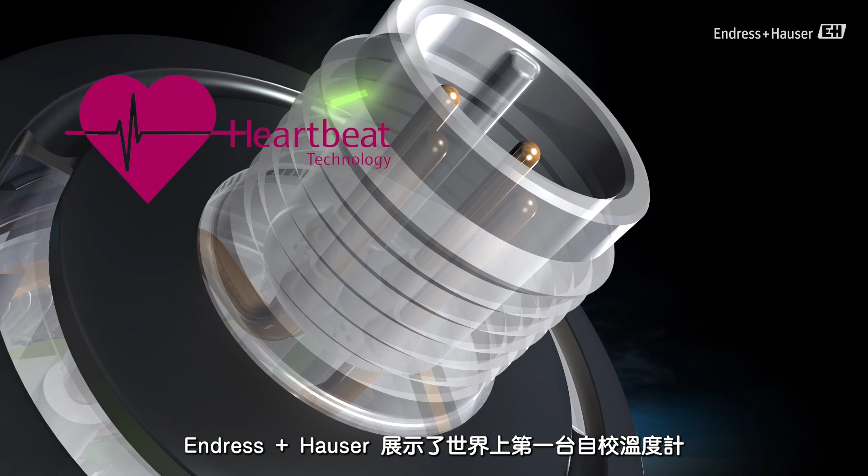Endress+Hauser presents the world's first self-calibrating thermometer, the iTHERM TrustSens with heartbeat technology.

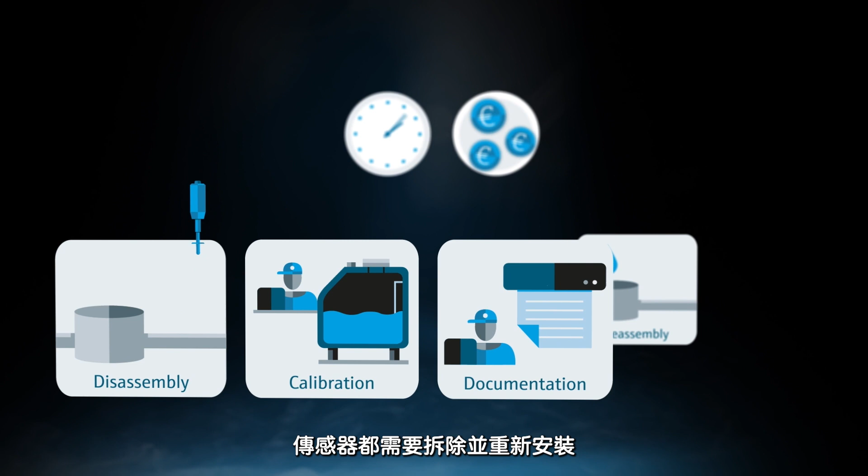In the regulated pharmaceutical and food industries, calibration of measuring devices is both standard practice and required by regulations. A modern biotechnology production plant for manufacturing medicinal products typically contains between 500 and 1,000 temperature measuring points, which all need to be regularly calibrated. This is a time-consuming and expensive process, involving shutting down the production plant, as all temperature sensors need to be removed and reinstalled as part of calibration.

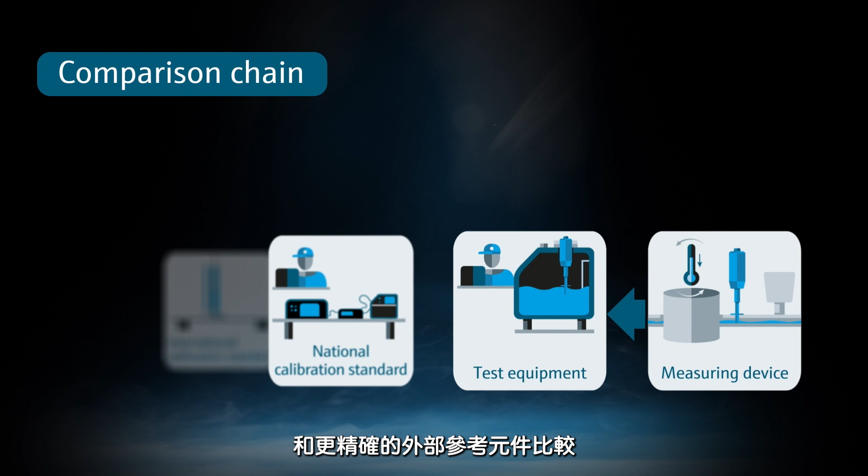One important principle of calibration is complete traceability. Within the comparison chain, each device to be calibrated is compared to a more precise external reference. This ultimately ensures consistent reference to recognized international calibration standards.

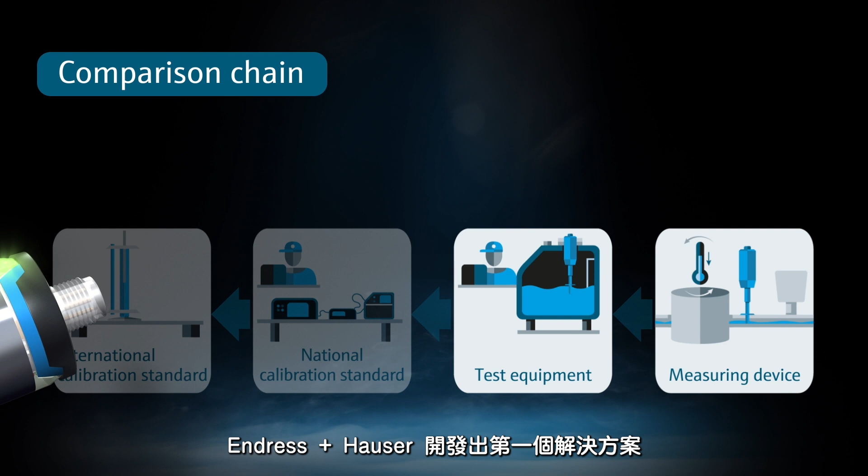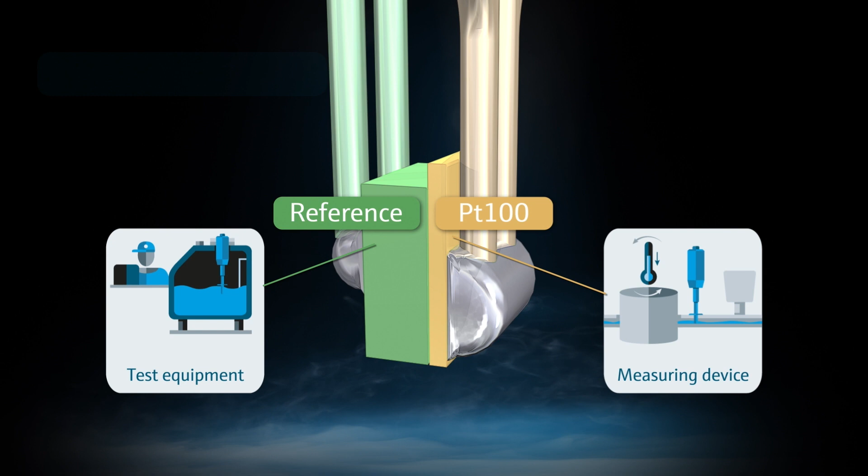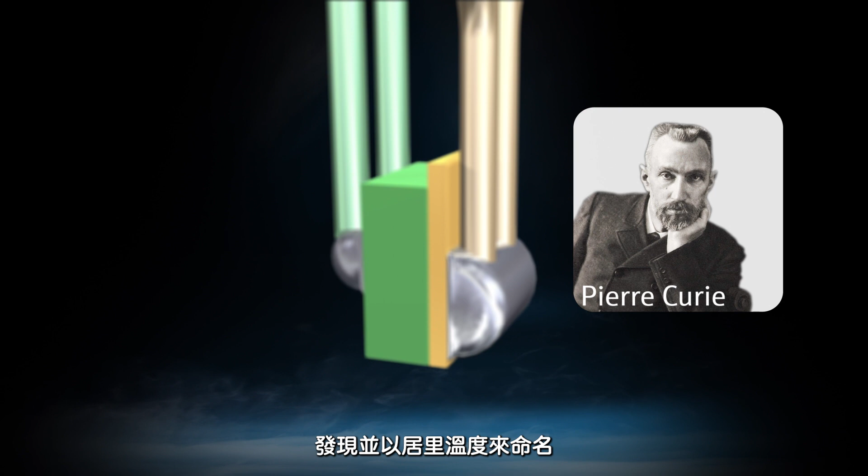Endress+Hauser has now developed the first-ever solution to integrate a high-precision reference with long-term stability into the thermometer itself. This is accomplished using a physical fixed point, the Curie point. The French physicist Pierre Curie discovered and gave his name to the Curie temperature, which is the point at which the ferromagnetic properties of a material abruptly change.

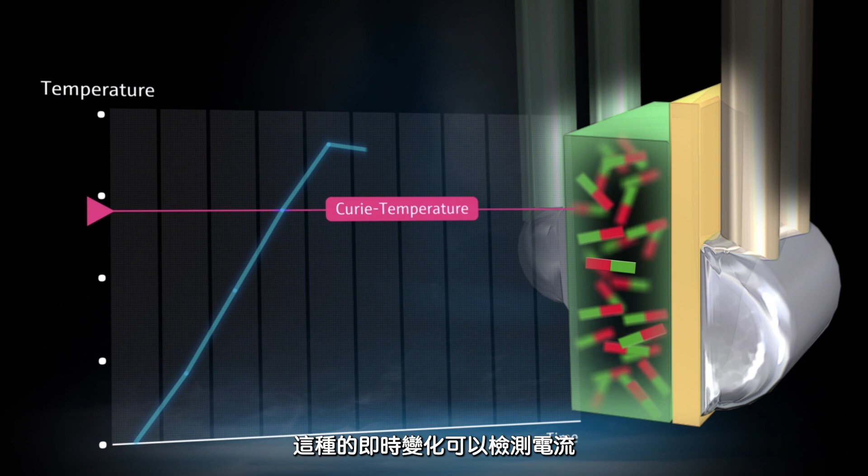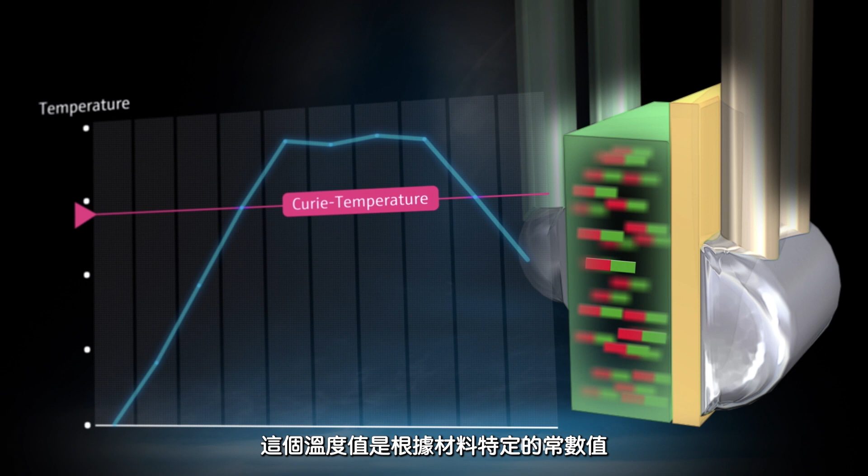This instant change in properties can be detected electrically, which enables determination of the point at which the Curie temperature is reached. This temperature value is a material-specific constant that will not vary from its originally determined value.

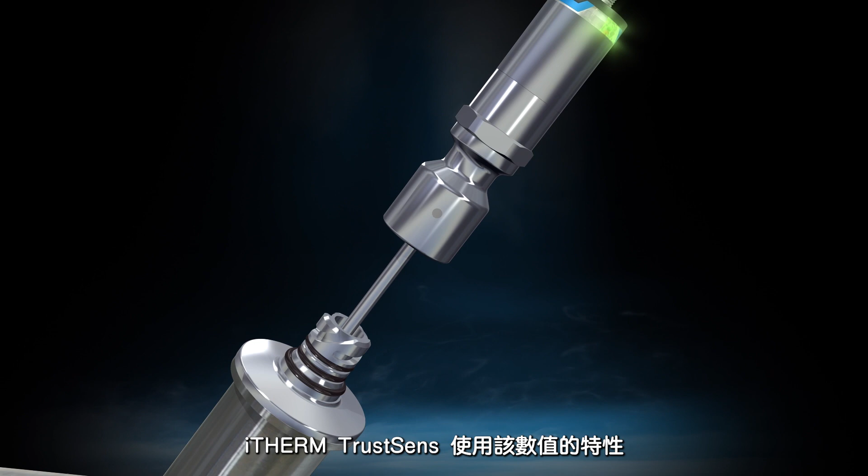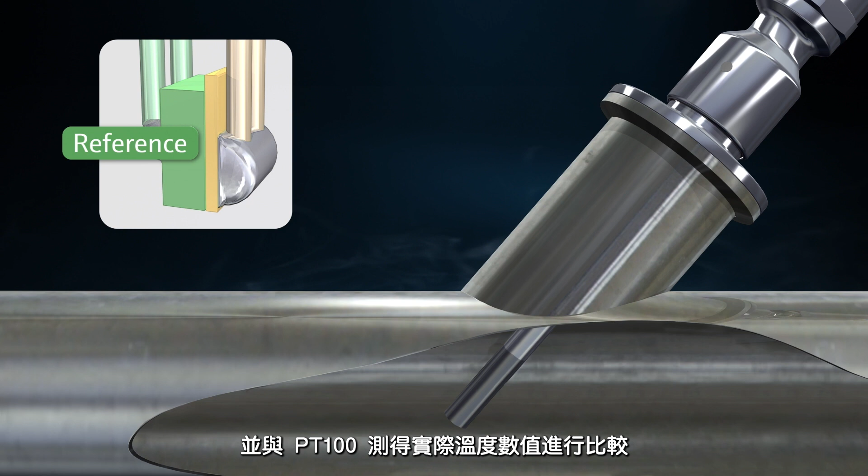The iTHERM TrustSens uses this value in the form of a reference sensor consisting of such a material. This provides a physical fixed point that can be used as a reference for comparison with the actual PT100 temperature sensor. In the example shown, the Curie temperature, which is determined with extreme accuracy for each iTHERM TrustSens prior to delivery, is exactly

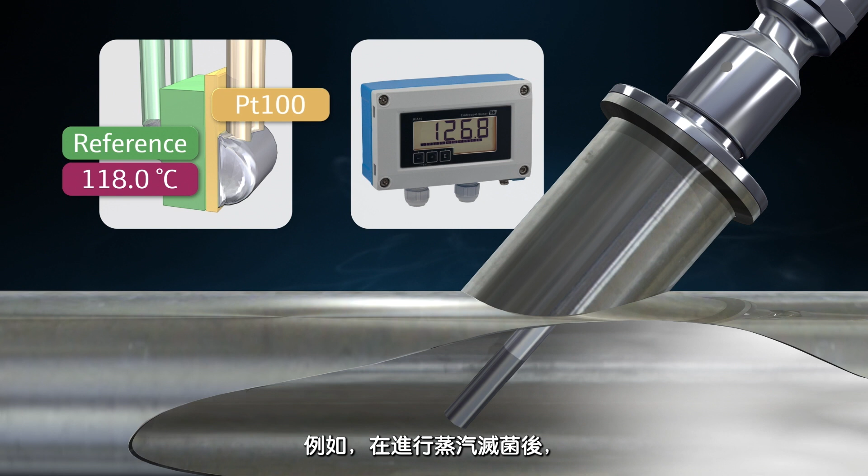118.0 degrees Celsius. Each time a cooling process is initiated, starting at higher temperatures, for example following steam sterilization of the plant, the PT100 sensor is calibrated automatically.

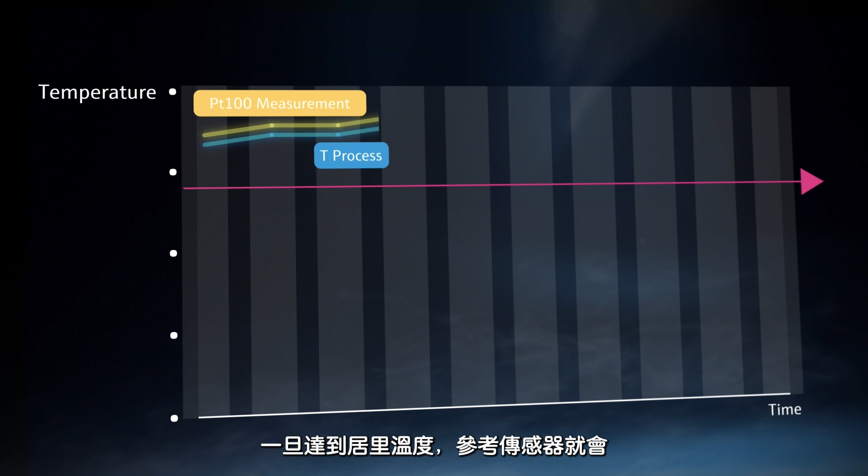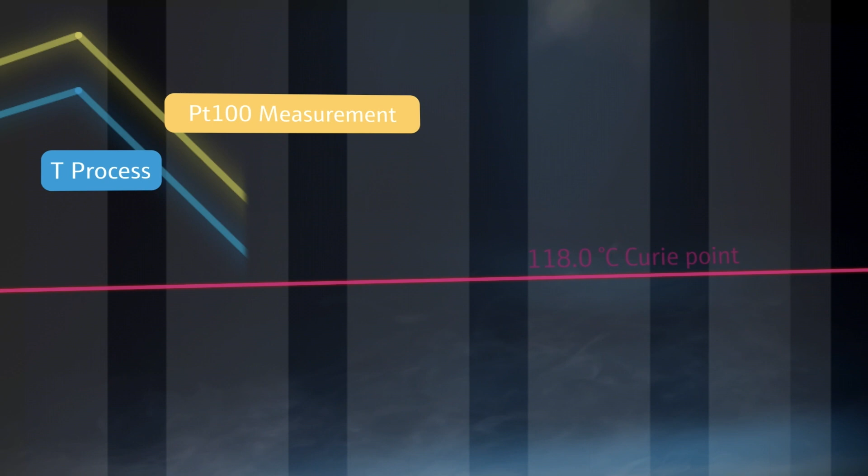Once the Curie temperature is reached, the reference sensor transmits an electrical signal. At the same time, a measurement is carried out in parallel via the PT100 sensor. Comparison between these two values is effectively a calibration that identifies any measured errors with the PT100.

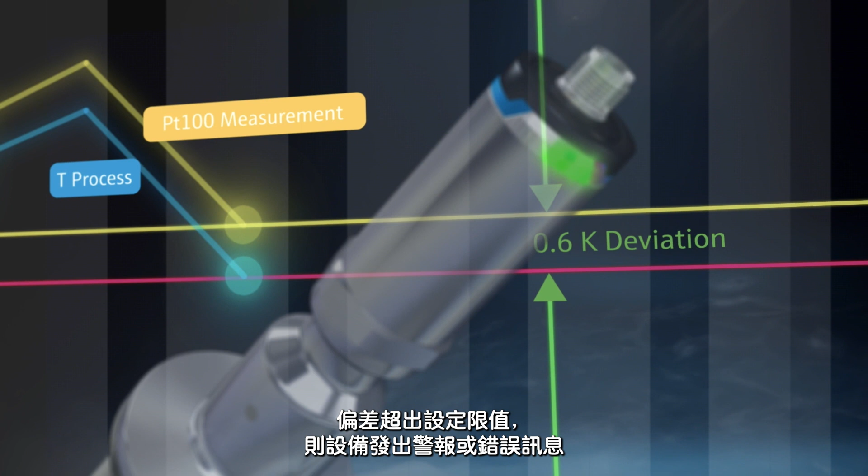If the measured deviation is outside of the set limits, the device issues an alarm or error message that is also displayed on-site via LED.

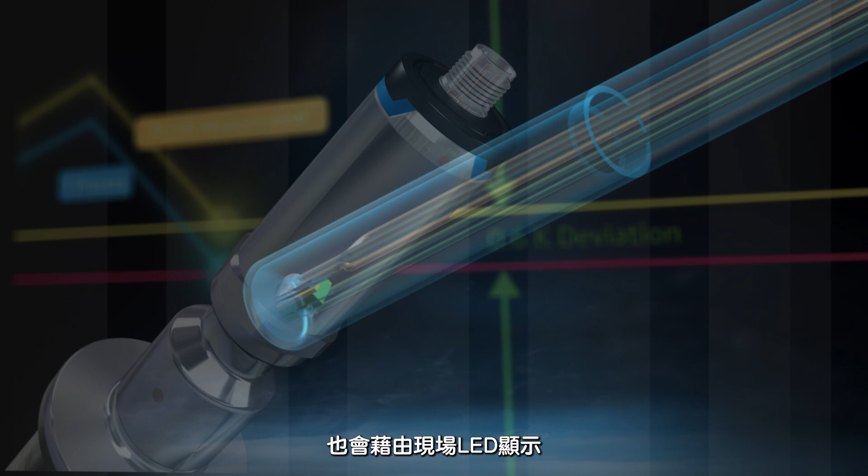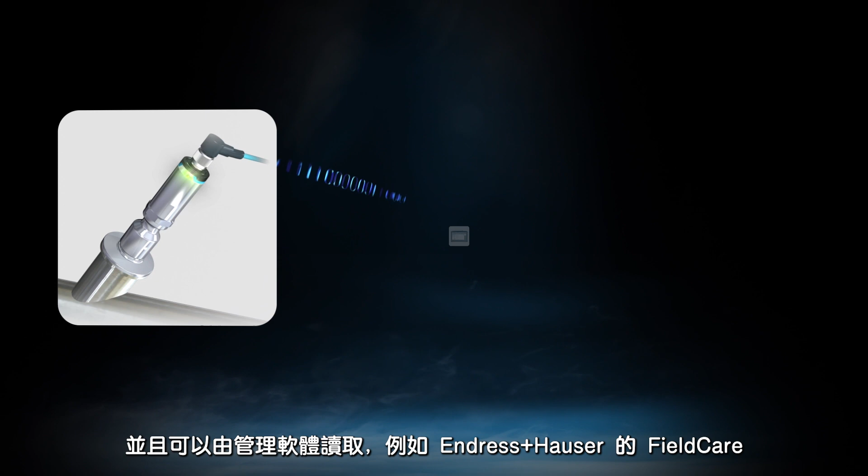The calibration data acquired is stored electronically in the device and can be read using asset management software, such as FieldCare from Endress+Hauser. This also enables an auditable certificate of calibration to be created automatically.

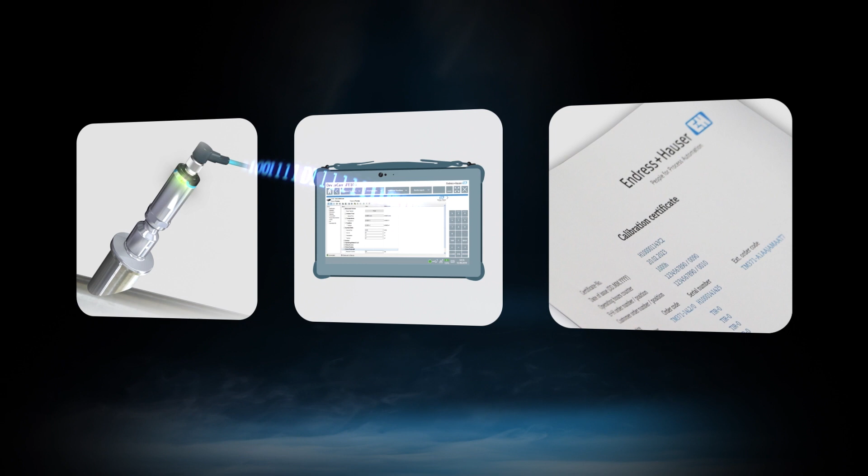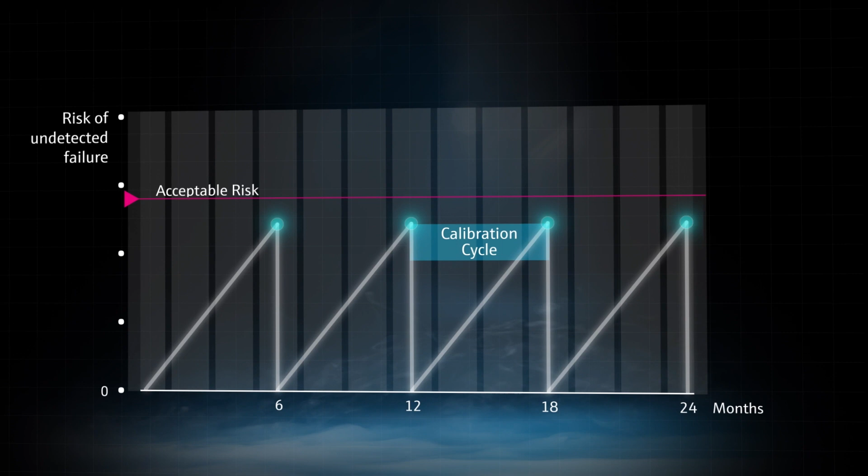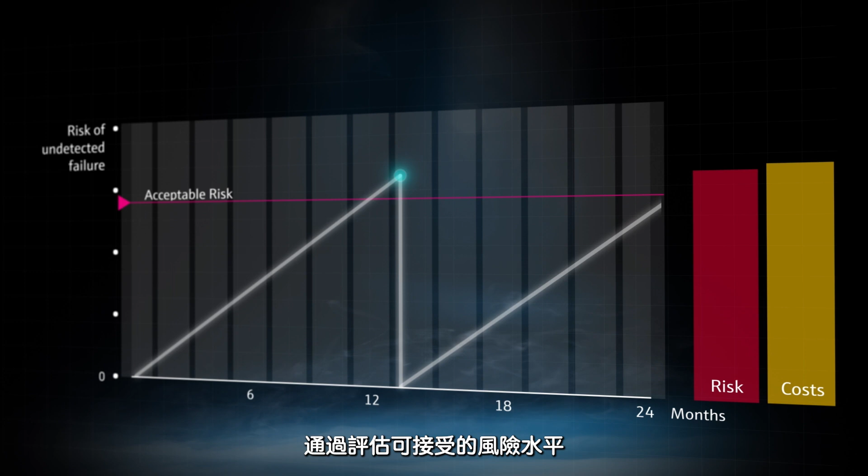All known temperature sensors, including Pt100 sensors, are subject to aging effects that can lead to drift. Longer calibration intervals increase the risk of undetected drift. Until now, these intervals have been determined by assessing the acceptable level of risk.

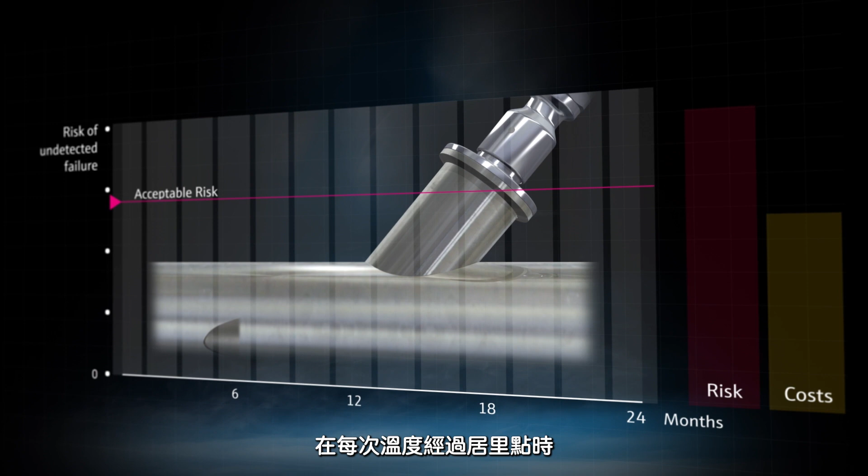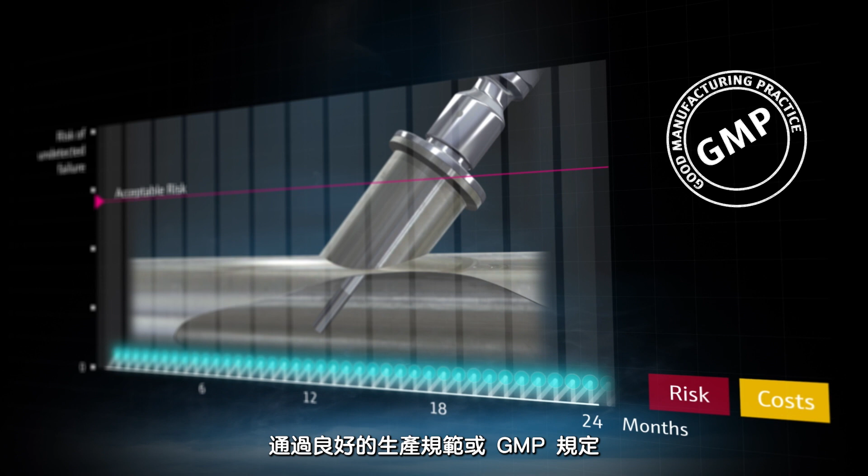Calibration is now carried out automatically in the iTHERM TrustSens each time the temperature passes through the Curie point, for example after each steam sterilization process. These cleaning processes are typically carried out with every batch. This drastically reduces the level of risk, prevents plant shutdowns, and avoids calibration costs. This kind of continuous process verification has even become required by Good Manufacturing Practice, or GMP regulations.

iTHERM TrustSens: risk reduction was never that easy.

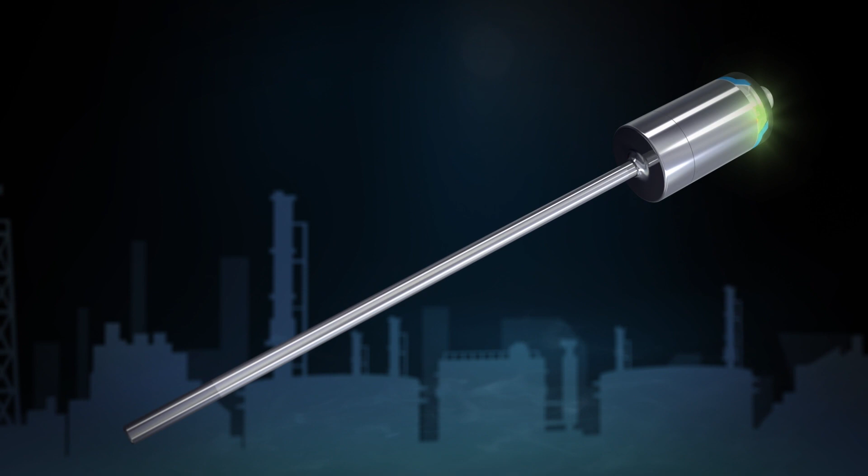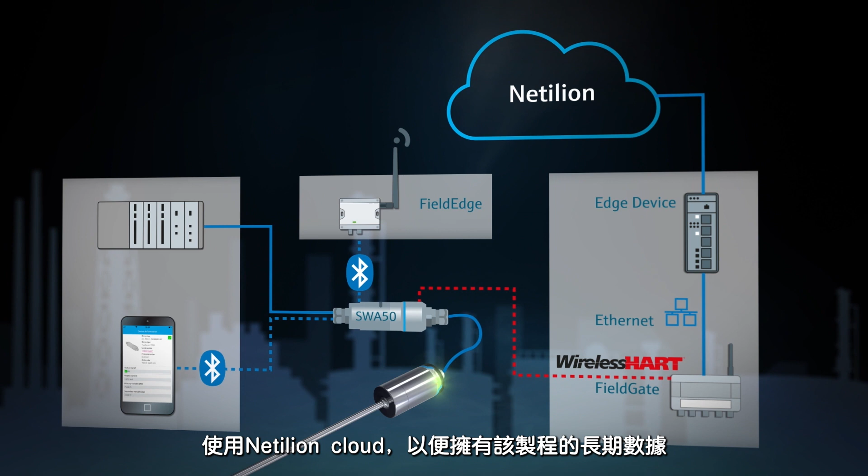The self-monitored device sends the calibration data via Bluetooth or WirelessHART to your control system, and if needed, into our Netilion cloud in order to have long-term metadata of the process health.